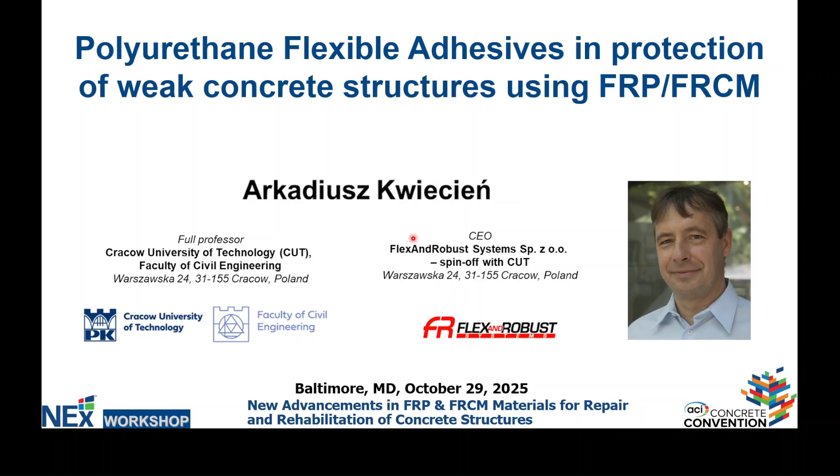I will present new technology based on flexible adhesives. As Celeste said, I am professor at the Cracow University of Technology, but also the CEO of the FlexAndRobust company, a spin-off with my university.

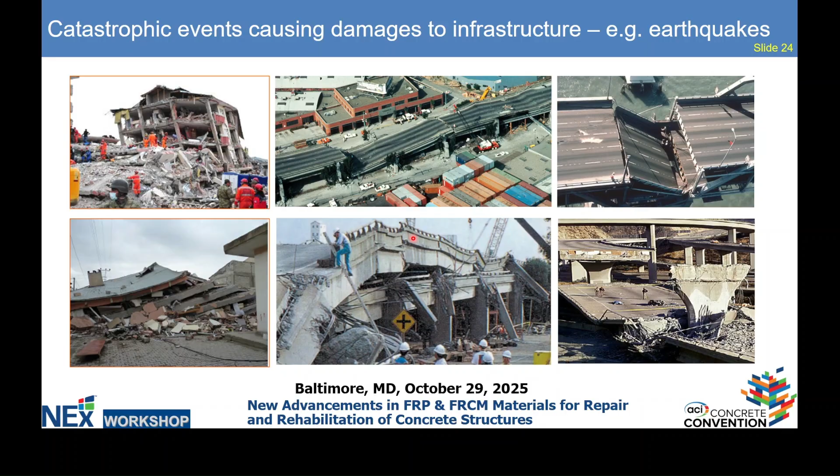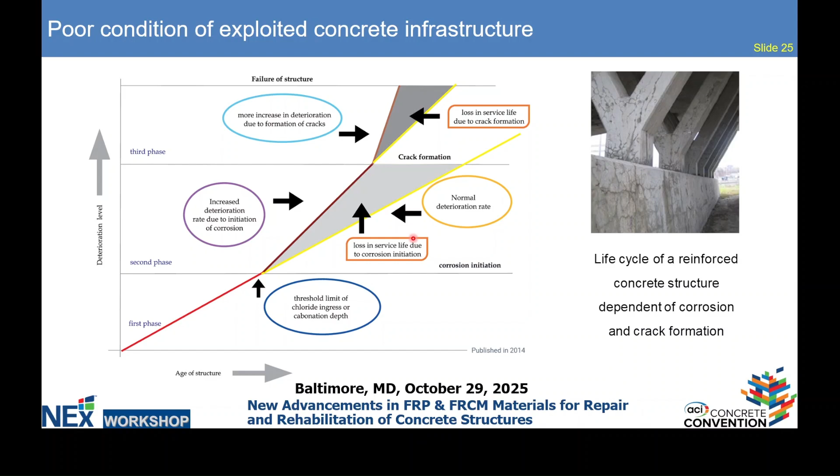When we consider catastrophic events and structures, we have a problem because structures collapse, and we would like to propose some solutions for that. For years we have been using concrete - 60 years these structures have been working for us - but they are corroding. There is deterioration of this system with time due to corrosion of the concrete and steel, shortening the life cycle of reinforced concrete structures.

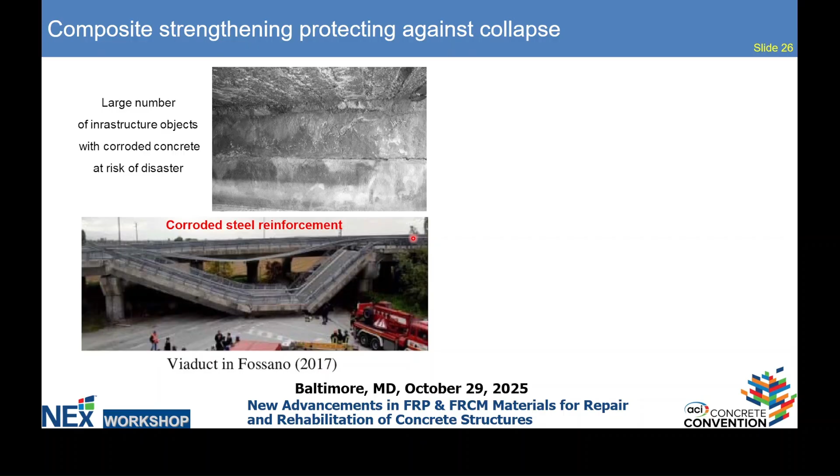It is known that the surface of this concrete is weak due to corrosion, so we have problems with the bonding area when we would like to attach a composite. If we do nothing, we can expect damages like immediate and sudden falling down of bridges.

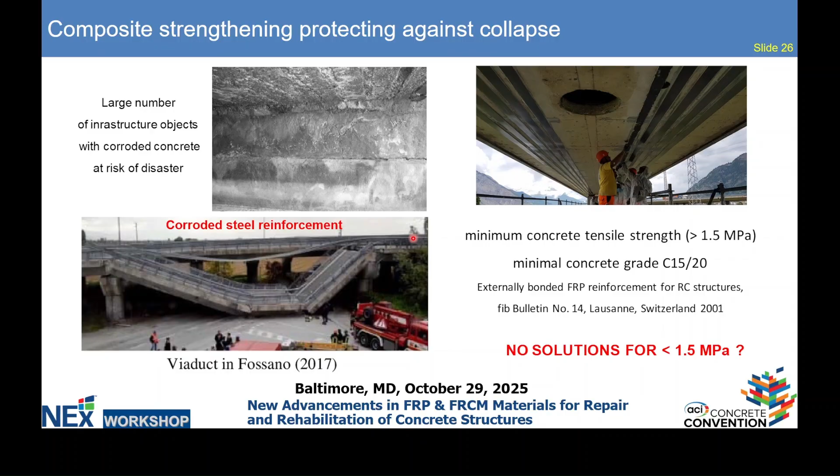So there is, of course, a solution. We can use composite as strengthening material, but the requirement of the FIB guideline is that the bonding strength - the pull-off - must be at least 1.5 megapascal. Is there a solution for lower values? I will talk about this.

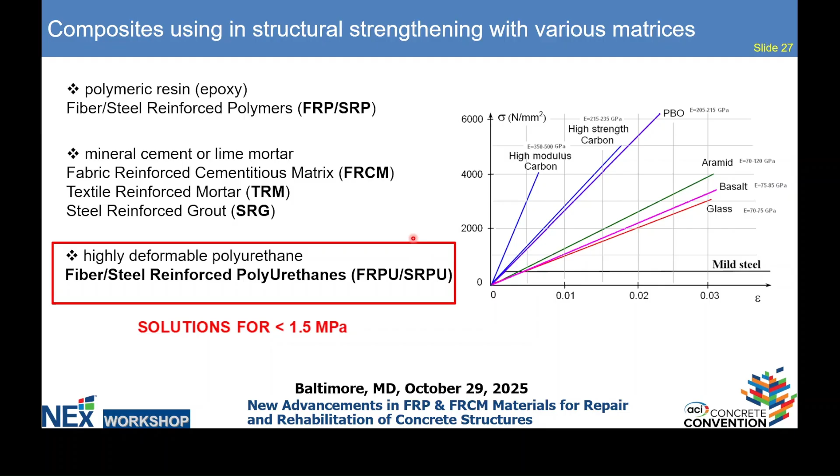Nowadays we are using polyurethane, polymeric resin like epoxy, FRP, also FRCM systems as Christian presented, and also the new generation polyurethane flexible joints. This is used for fiber steel reinforced polyurethane systems, which are able to bond to substrates with lower strength.

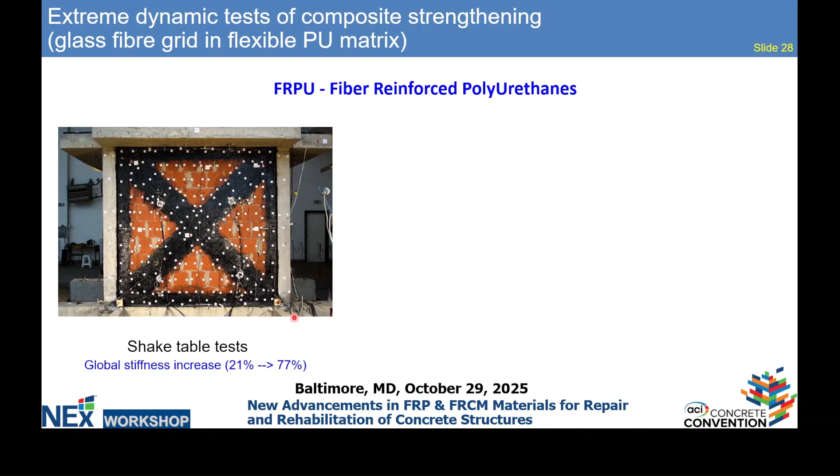This is a presentation of the effectiveness on a shaking table test, real scale system strengthened with FRPU. Global stiffness was increased from 21% to 77%.

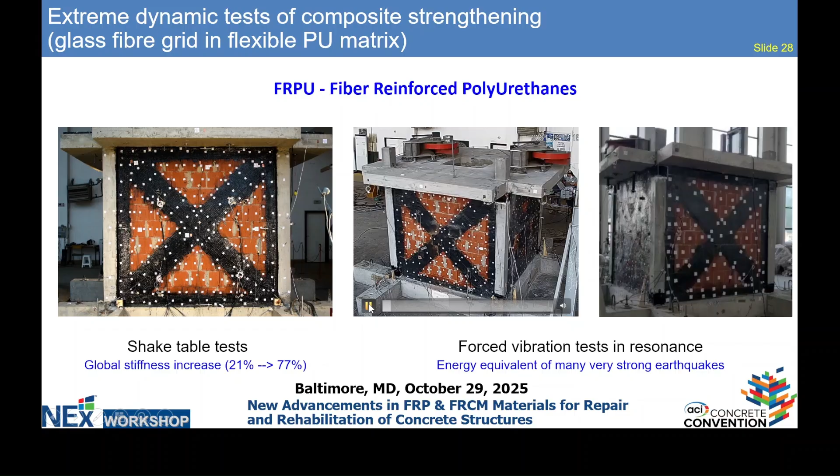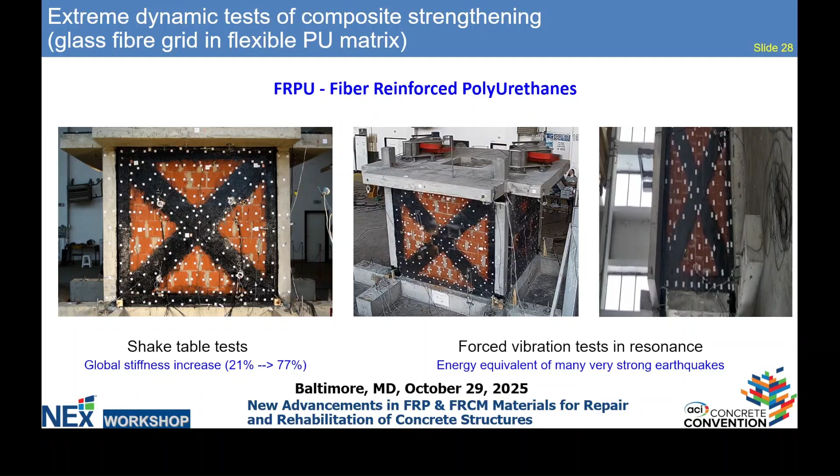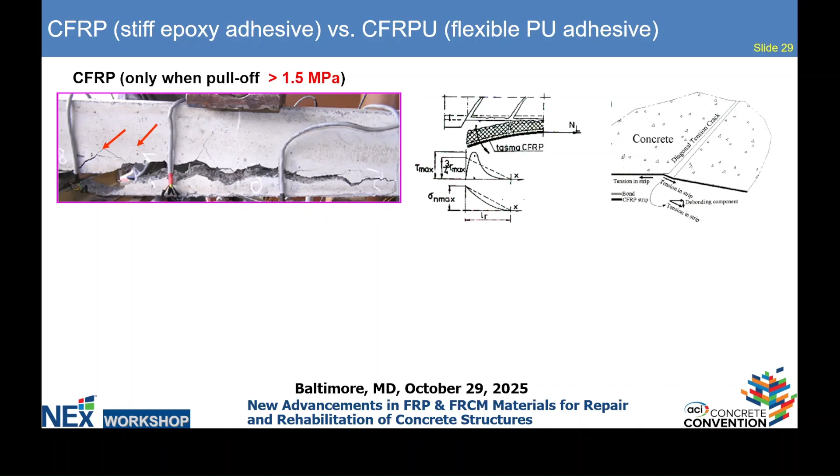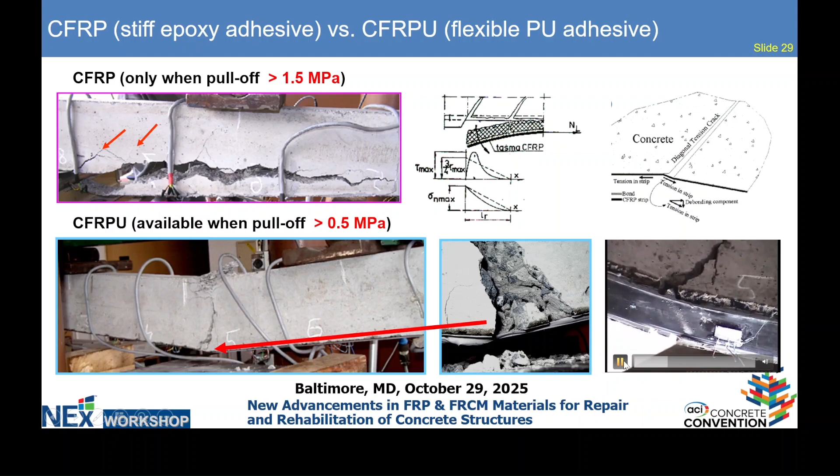Now, when we use composite materials as strengthening, I mean FRP, we have stress concentration that causes delamination. When you use an FRPU system - the flexible polyurethane as an adhesive - you are able to transfer high loads and high deformation simultaneously, while also protecting the structure against collapse.

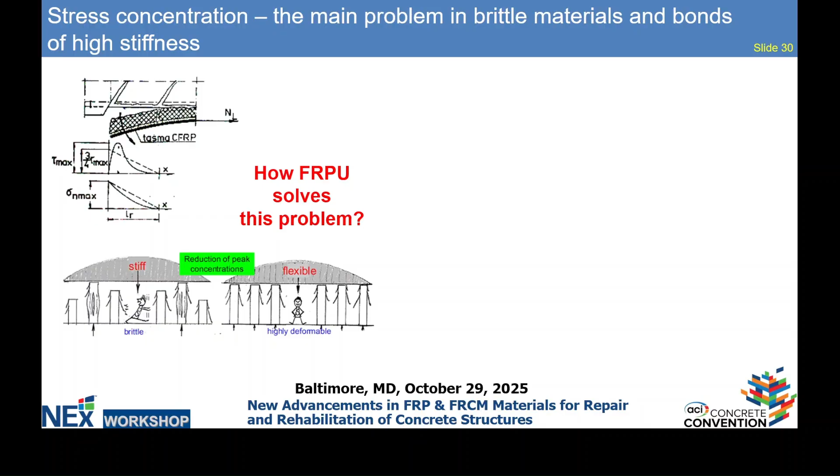So how to solve the problem of stress concentration? It is quite easy, because we should redistribute the stress more evenly when we use a flexible adhesive. If we consider shear stress, we have stress concentration related mostly to stiff epoxy adhesives. But when we use flexible polyurethanes, we redistribute the stress more evenly.

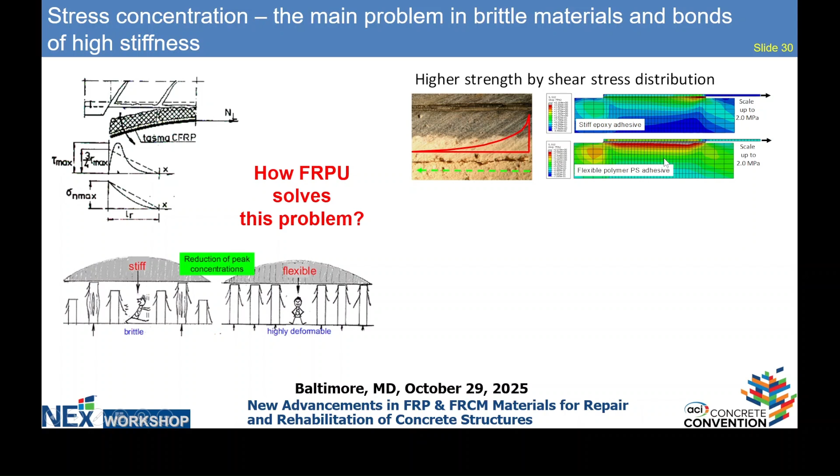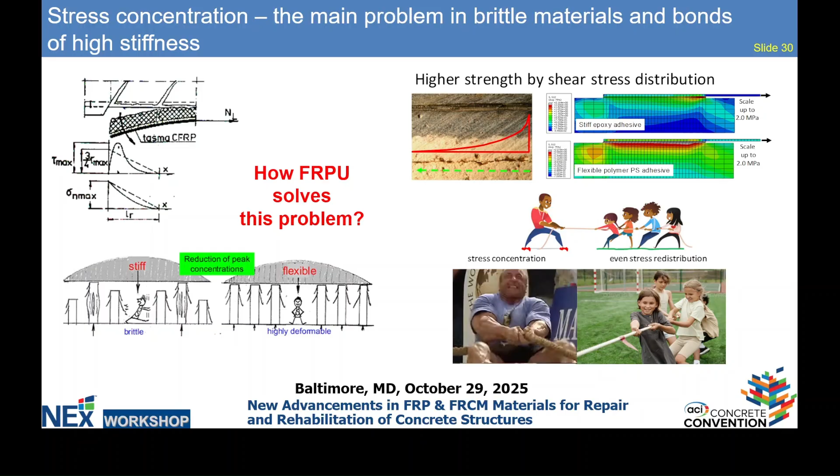This is like a competition with a rope. On one side you have a strong guy, on the other side you have children from kindergarten. Who will be the winner? 100 children should be enough.

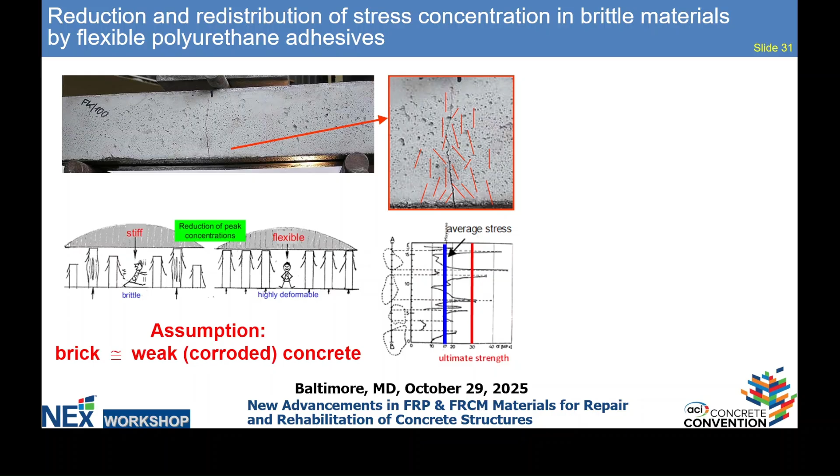So when we have mineral mortar or mineral concrete, the crack starts due to micro cracks from stress concentration. When we redistribute the stress more evenly, we can reduce this stress and also increase the capacity of the structure. So let me assume that the corroded weak concrete is a brick.

This is a brick that was damaged in 4-point bending, then repaired with cementitious mortar - we don't recover the original strength of the brick. When we bond it with epoxy, we increase only 7% due to this zone with micro cracks. When we bond it with flexible polyurethane, we increase 90% of the total strength. So it is better to break the brick, rebond it, and use it.

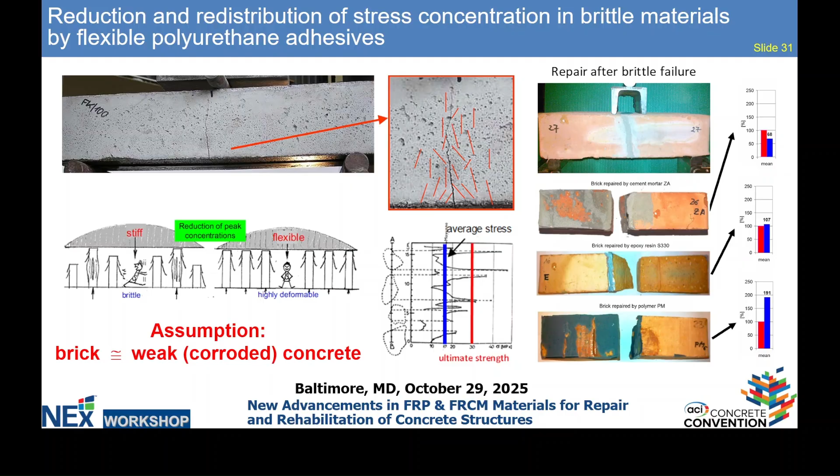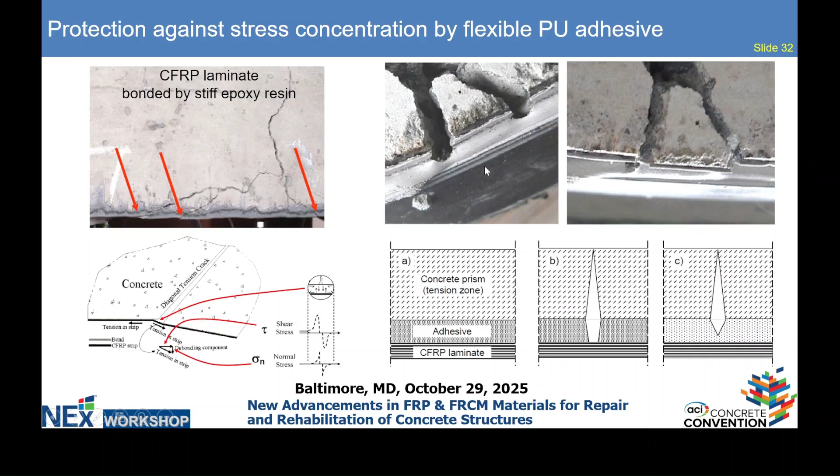So when we have stress concentration according to shear, as Cristiano presented, in stiff epoxy we have direct attack of the crack on the composite material. When we have flexible material, the composite is protected because the stress is more evenly redistributed.

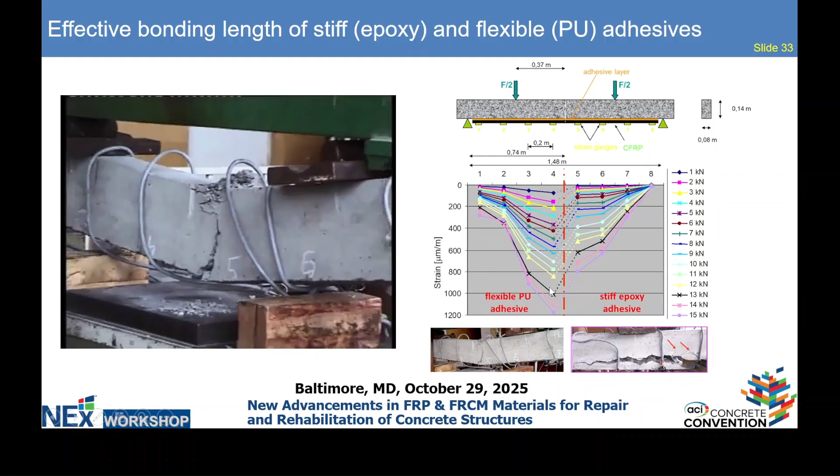So when we compare two systems - on the right-hand side stiff epoxy, on the left-hand side flexible adhesive - you can see that for the same load, we have more effective use of the composite material according to the strains measured on the surface. Also, the damage is not sudden.

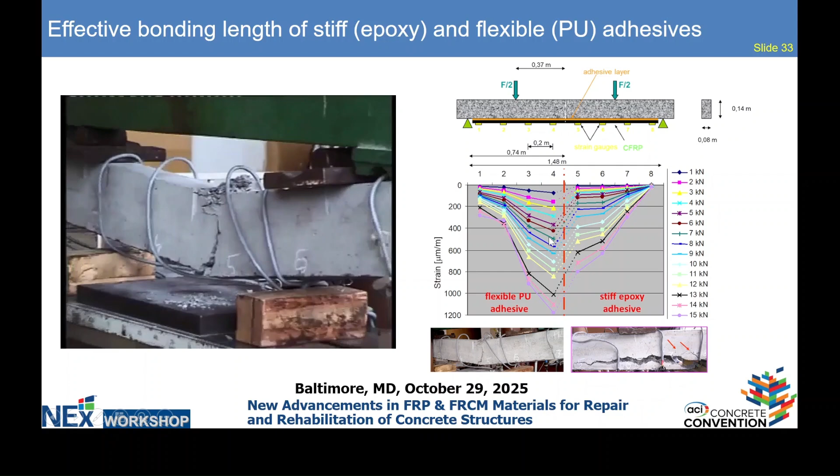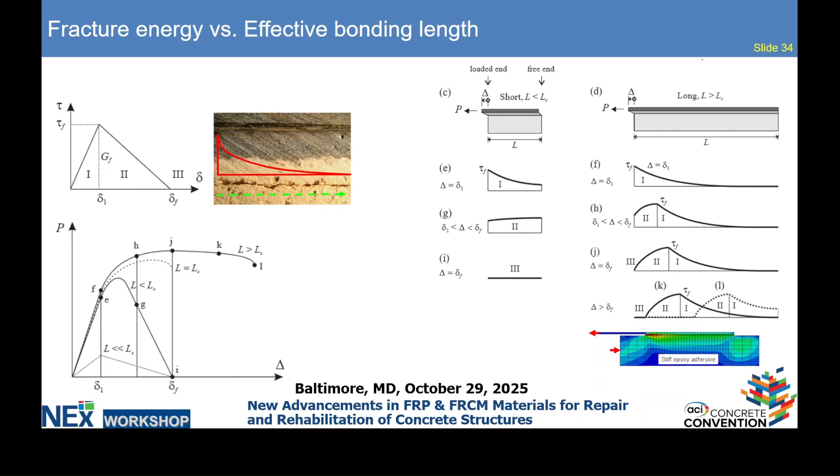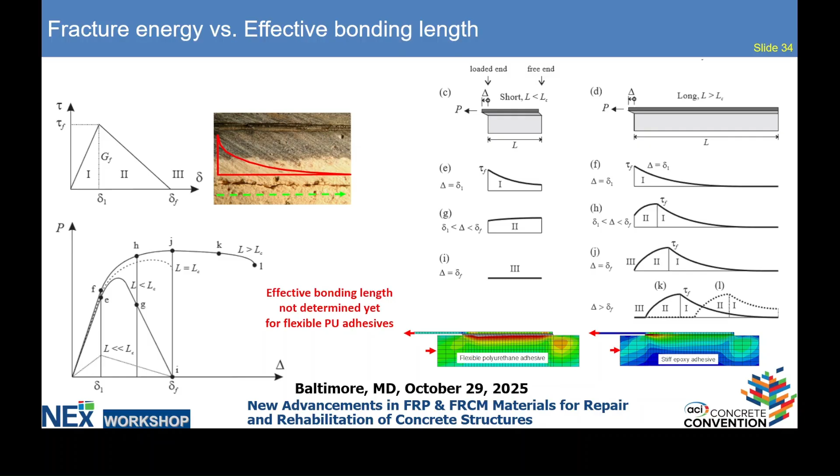Going to fracture energy: typically using FRP, we assume that the substrate is the more critical element, so the stress concentration is cutting that. When we don't have effective bonding length, we get this curve. When we reach the effective bonding length - for epoxy it's quite short - we fully use the properties of the system. But in the case of flexible polyurethane adhesive, we haven't found the effective bonding length yet.

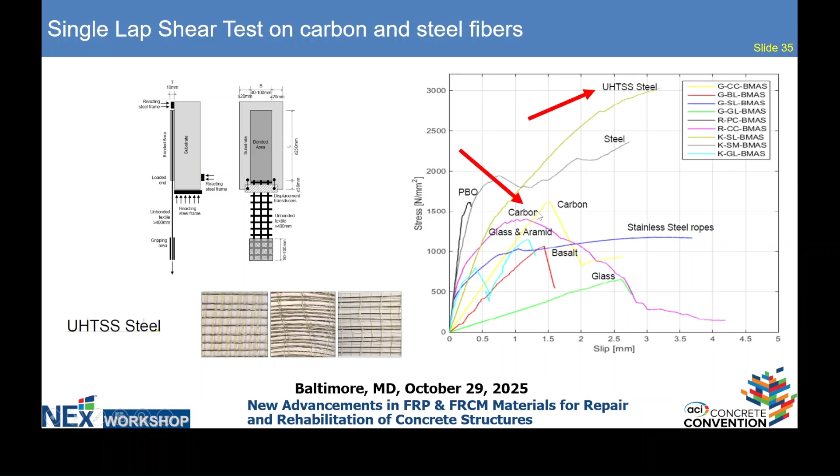So I will skip the introduction regarding the single lap shear test, because Cristiano presented it very effectively. I will present two composite fibers - ultra strength fibers from steel and carbon fibers. These are single lap shear test results.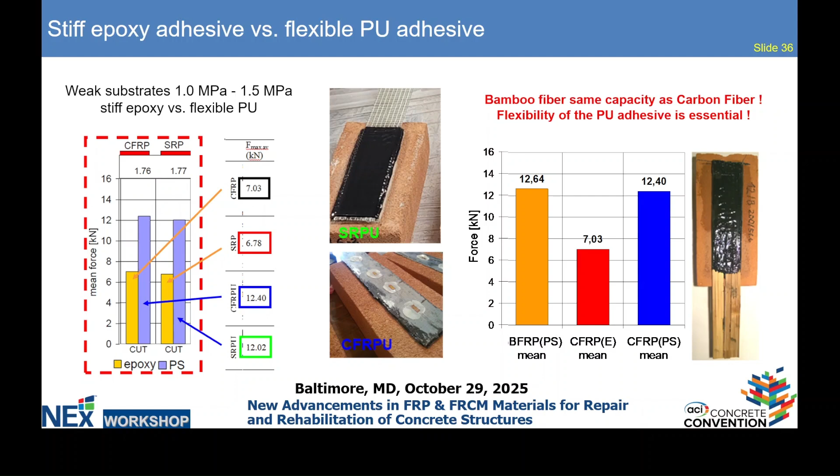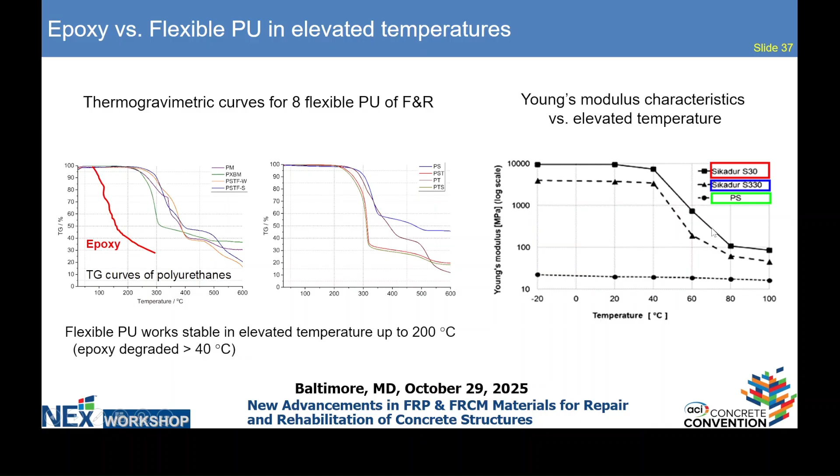So the adhesive is the critical and crucial point here. When we compare epoxy with polyurethanes, polyurethanes are stable up to 200 Celsius degrees in elevated temperature, whereas epoxy loses its properties. This is presented here according to Young's modulus.

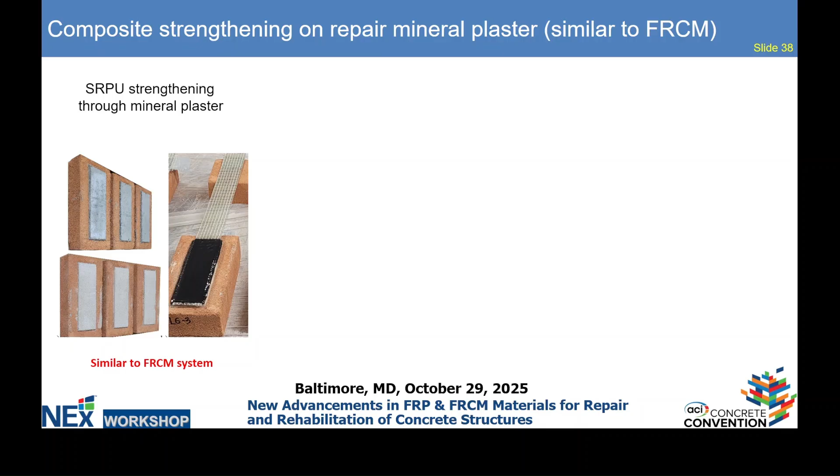So coming to the FRCM system. FRCM system, as Cristiano said, is the sandwich of fibers and mortar. In this sense, we used mortar only at the bottom, and bonded at the top with polyurethane flexible matrix. The blue one is when we don't use the mortar, the C is when we use cementitious mortar, and L is when we use lime mortar. So can we assume that lime mortar is the deteriorated concrete?

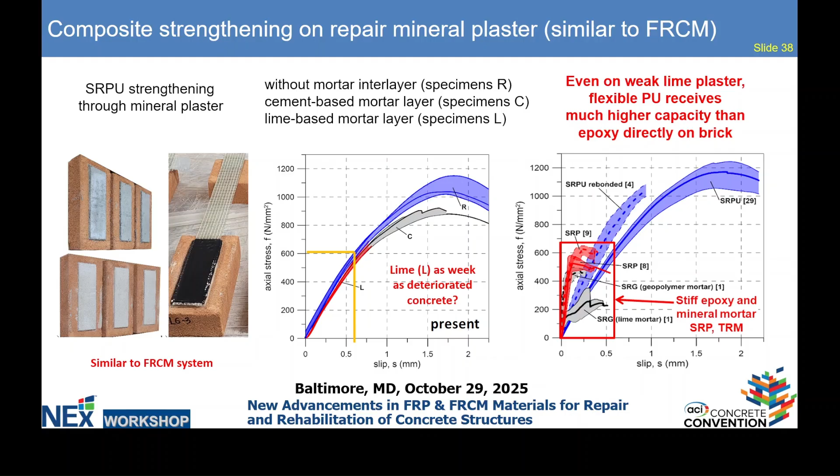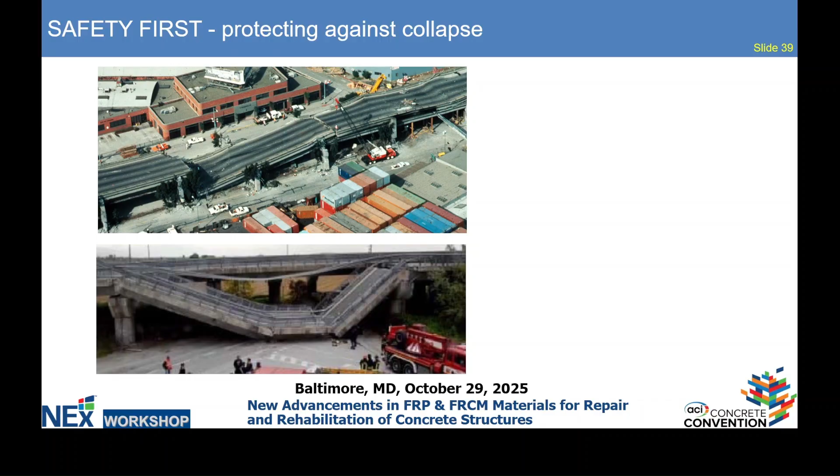Let me assume. When we compare with some literature, this is the same area. You can see the effectiveness of SRPU and also some FRCM systems compared with this polyurethane system. It is much more effective, especially much more ductile. So when we go to structures and sudden falling down, safety should come first. We should protect the structure against that, and flexible polyurethane flexible joint adhesives were developed by FlexAndRobust System to keep the structure in position.

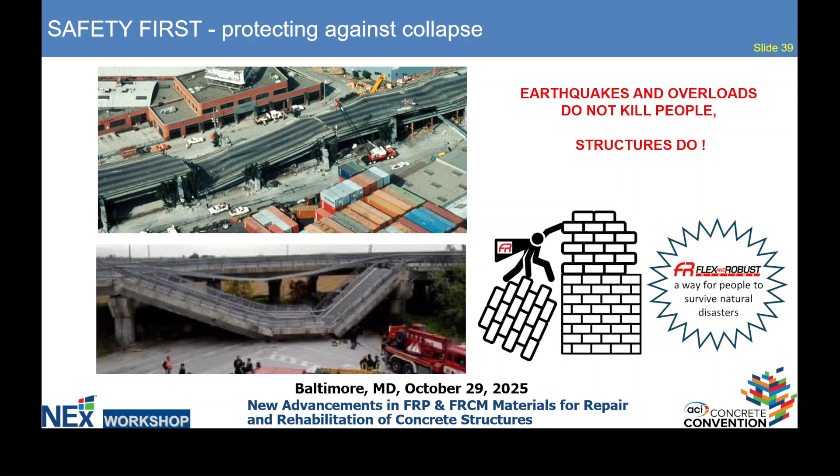I will now present you some movies.

They are not implemented here. I don't think you can present them on the screen like that. I can't, I'm not sure how to move it to the screen. I tried sliding it, maybe it's on the other screen, but I don't think we can see it. Move it, try moving it. Okay, this, okay. Oops. No, nothing works.

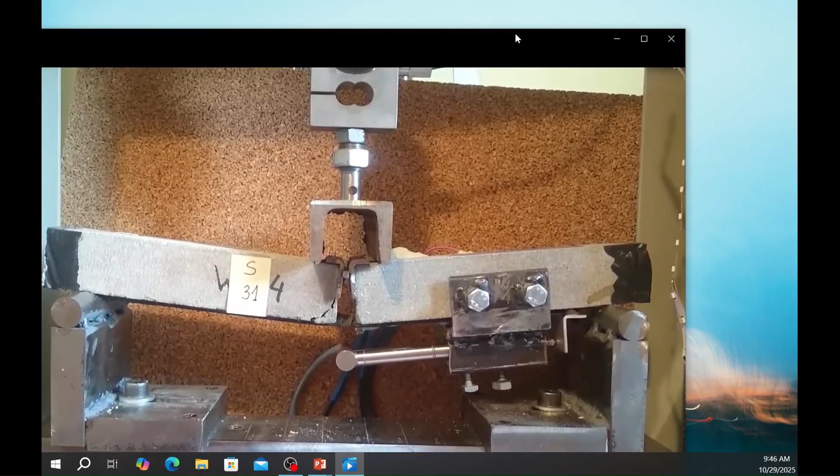So in this case, when you can see, there is a warning of the system. The structure is deflected, and before the action, it gives a warning.

So next, a more flexible adhesive. At the end, when we unload it, you can observe that it rises up. It is not reverse moving. So in this system, we can protect the structure and hang the cracked structure in position.

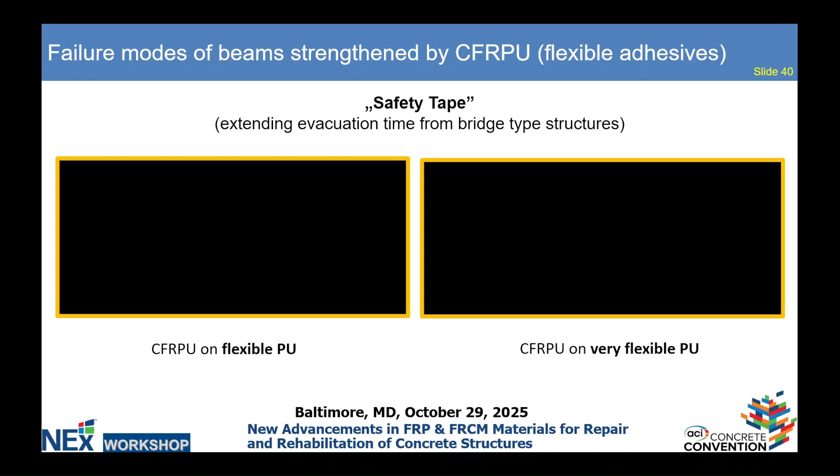So coming back. Okay.

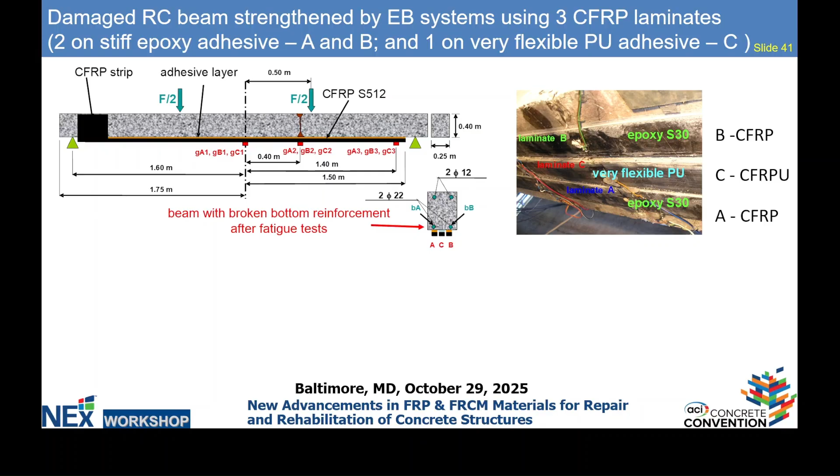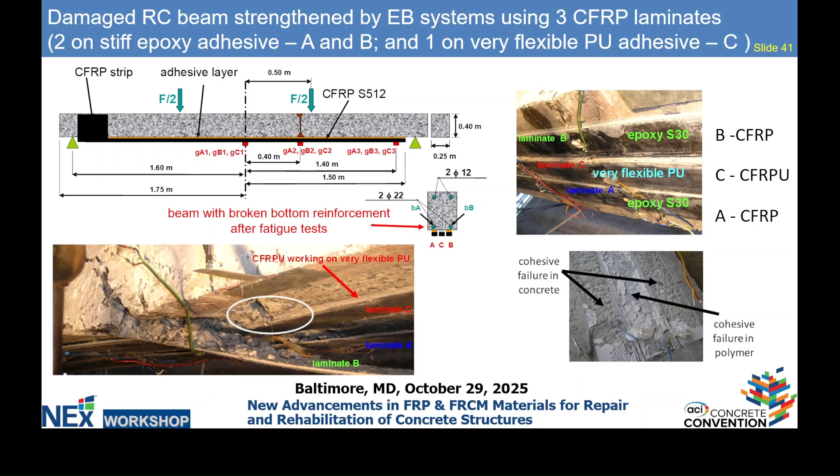So another case, we have a completely cracked concrete beam, 3 meters long. There are 3 composite materials: 2 on epoxy on both sides, and 1 very flexible material in the middle. During the loading, both carbon fibers on epoxy detached and everything was hanging on this flexible polyurethane. You can see when we assume the design point here and go to the ultimate point, at these points the carbon fibers detach from the epoxy resin. From this point, everything started to hang. So we are still over the design point.

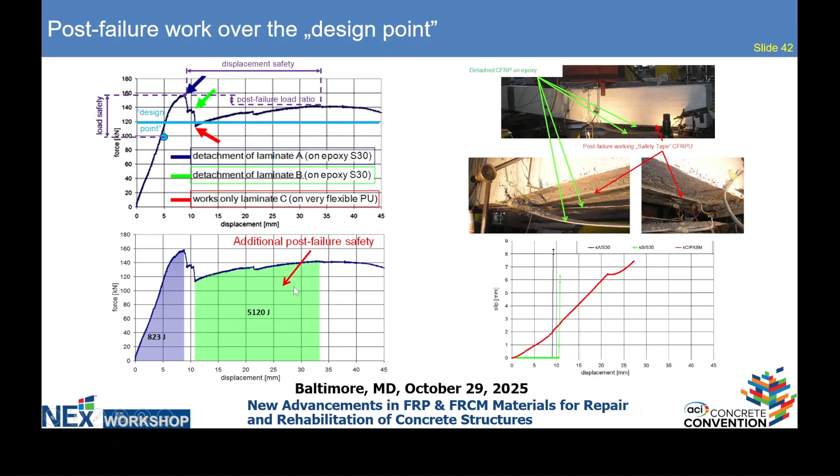Also, as you can observe, the slip at the end of the carbon fibers: with epoxy, there is nothing until the moment of damage, but we have a continuous process of observation when we have flexible adhesives. What is tricky here is that we add safety to the system, more ductile behavior of the structure.

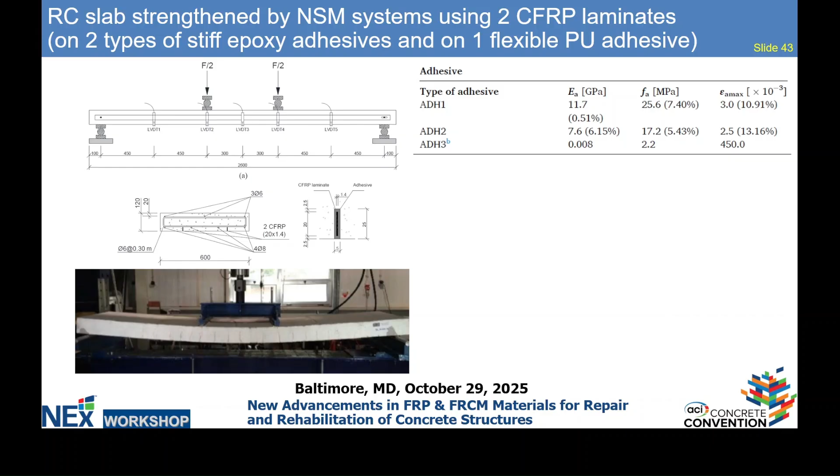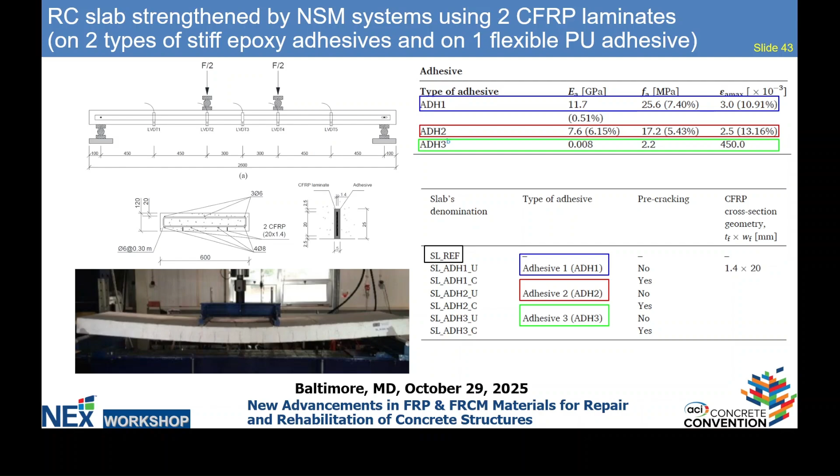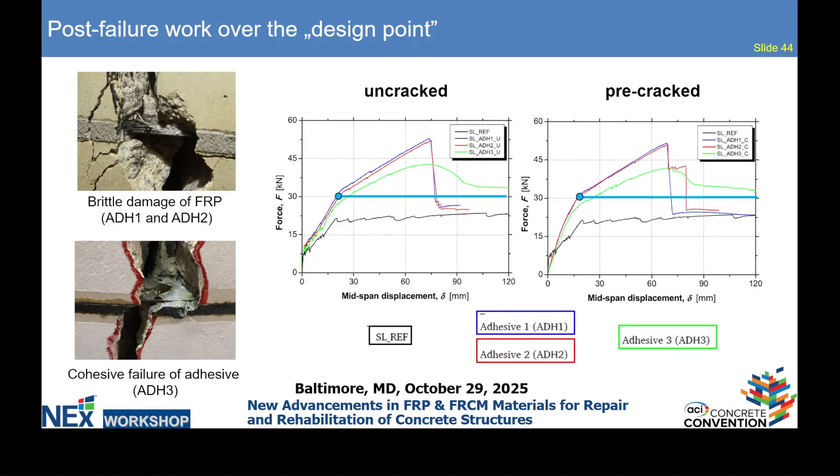So confirmation from the NSM system, research done in Portugal at Minho University: 2 carbon fibers with epoxies and 1 carbon fiber with polyurethane. We tested it in pre-cracking and after-cracking repair. You can observe that the blue one and red one are epoxy, the green one is polyurethane. You can clearly see that there is sudden failure, but with polyurethane we have stable, almost continued working after the damage, post-failure behavior. So this is safety.

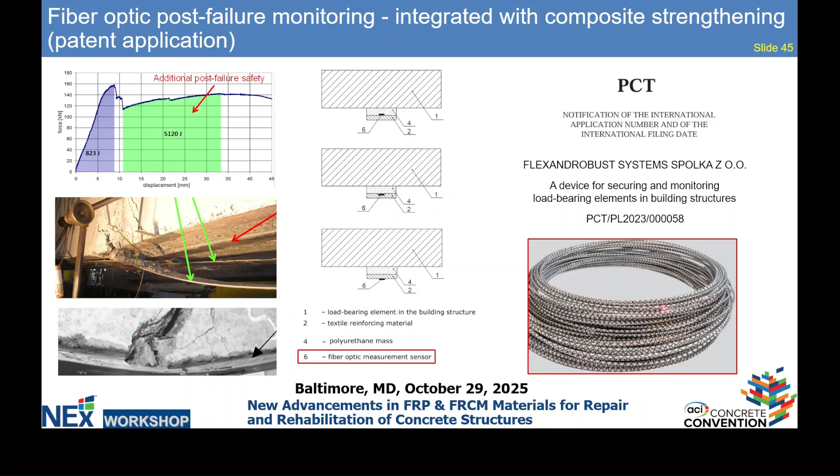Also, we can integrate the carbon fibers with a fiber optic system to measure the real life of the structure, to have information not only before the damage, but also after.

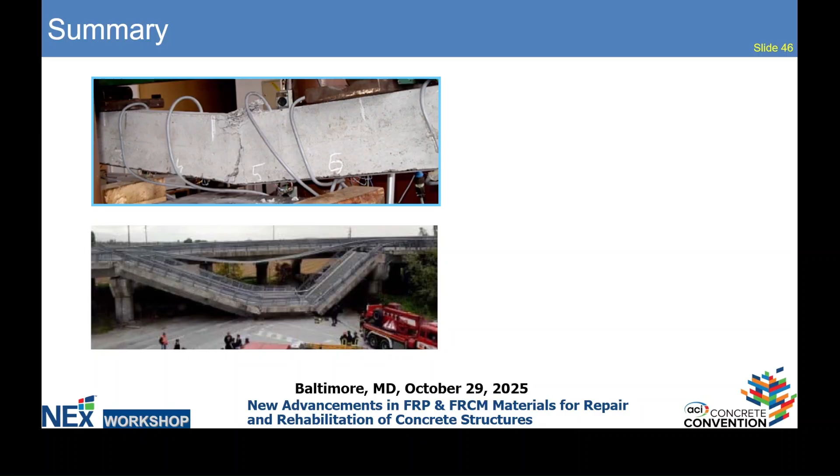So, as a summary, we propose to use this system to protect bridges that are old and corroded against damage. If you would like to maintain the system but don't have time to repair 100, 200, 1,000 bridges immediately at one time, if you bond this system, you are protected. You can hang it there in case of an unexpected event. We can use it simultaneously with classical strengthening systems.

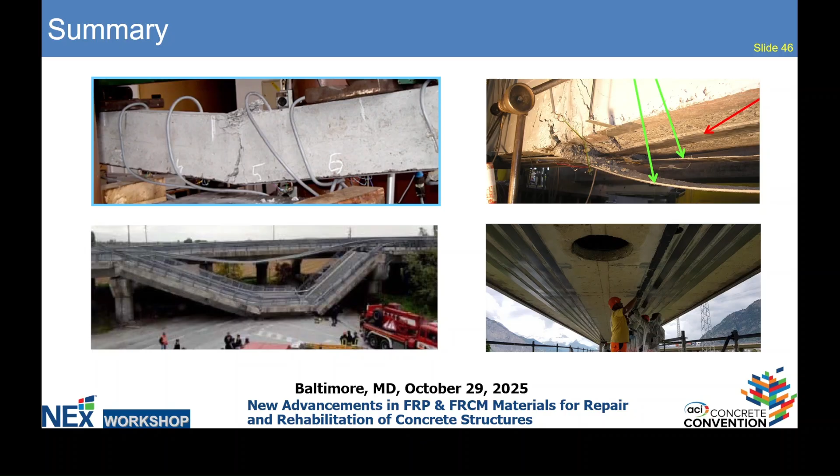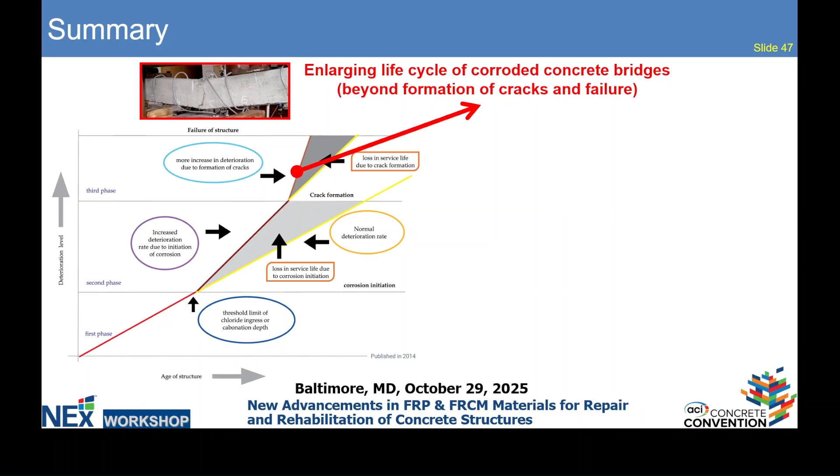So in this sense, this is an additional amount of safety in the structure. In this graph, I would like to show that we can overcome the limit of time that is constrained by deterioration, so we can enlarge the usage time. Also sustainability, because if we don't remove the structure, we make it more sustainable. This safety tape enlarges the life cycle of existing, corroded concrete bridges. It also increases safety related to enormous excitation, because we never know when we overload the structure, and it can be quickly installed to protect against catastrophic earthquakes and also against sudden failure.